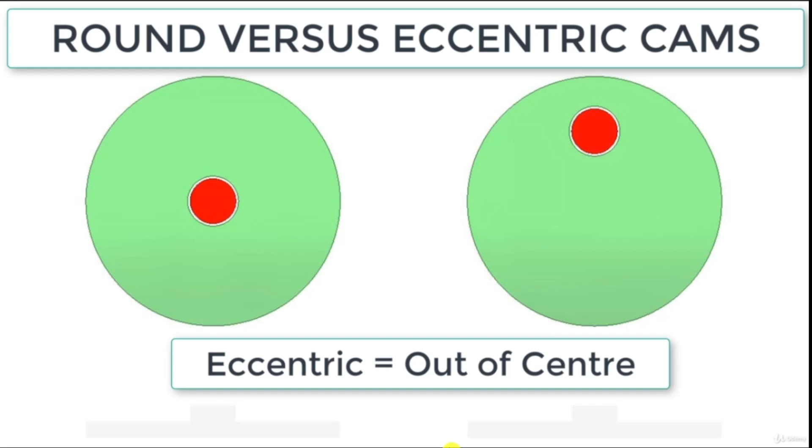I'm going to go to the circle cam, open the file, and add a small cutout on this. Select the rectangle and extrude. Just pull that out 10. Close and return.

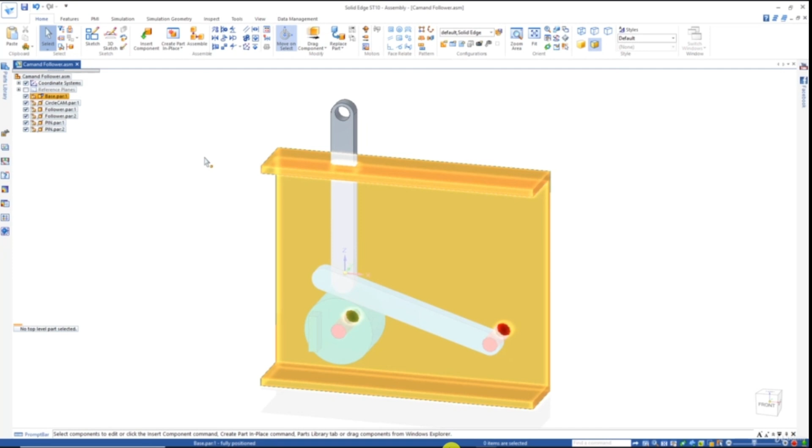Now when I add a motor, you'll be able to see this actually turn. Around the center, flip direction, finish. I'm just going to run this now. Now when we hit play, nothing else happens. You can see the motor's turning, but that's it, because it's circular.

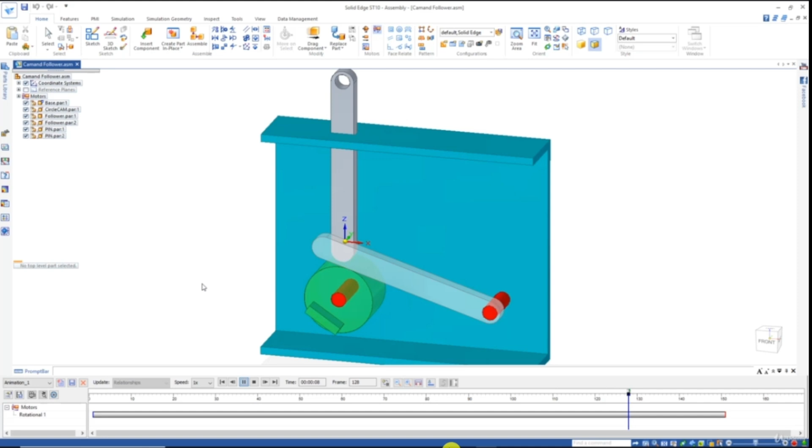Now let's take a look at what happens when we modify the hole on the circle. I'm going to open the circle cam part again, identify the circle, and push the circle out 15. Close and return. And now the whole model updates.

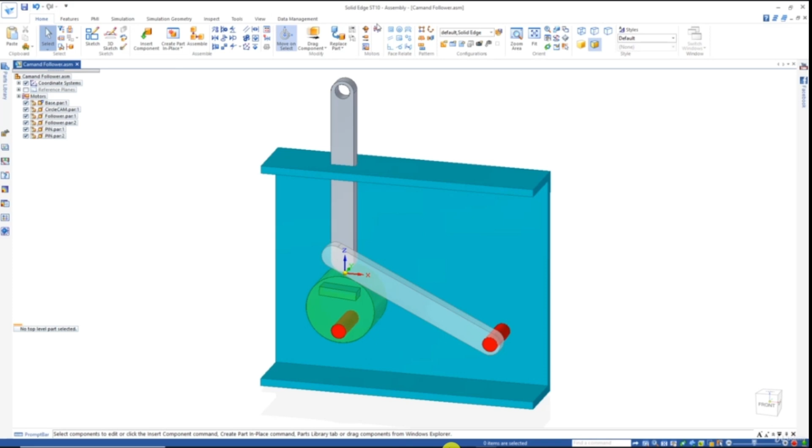I go back here to play again. Now it's off center. When the circle moves out, it acts as a cam with a very even and smooth stroke.

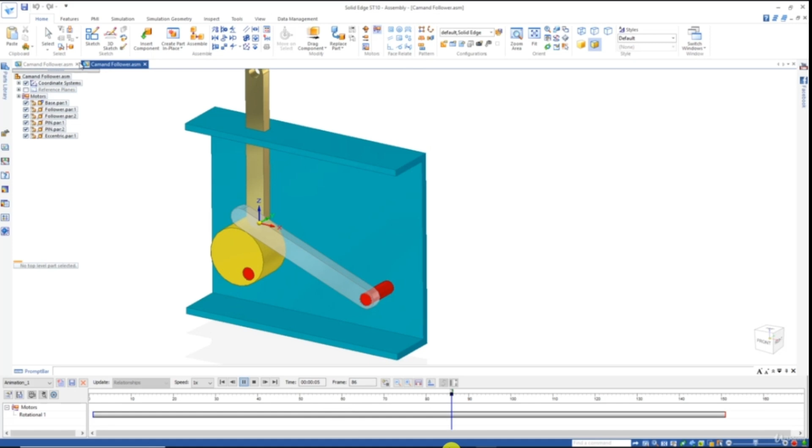To highlight this constant rate of motion, let's add a right angle to this arm. I'll go back and identify the part, the follower, right mouse click to edit, zoom in, go to the line command, and sketch on this face.

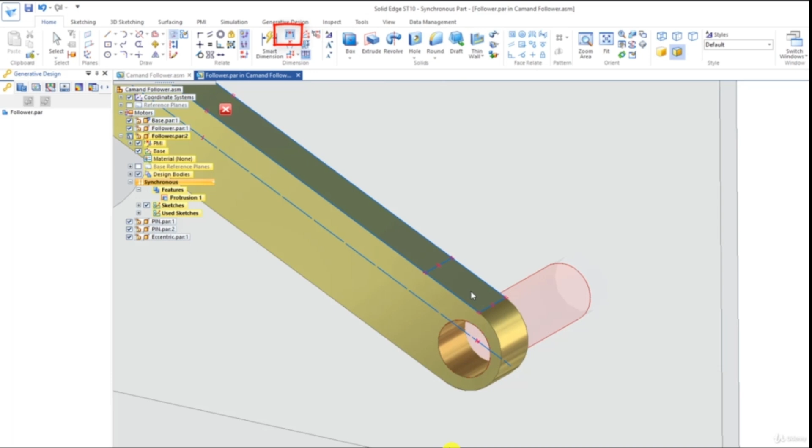I'm just going to draw a line right across here, and then borrow some geometry, borrow this line here and these two on the outside. I'd like to also put a dimension on here to keep this at the same thickness.

And I'll make that 12. Select, identify that region, and I'll pull that out 145, and fit the view. And obviously because I've changed this one, it changes this one because they're the same part.

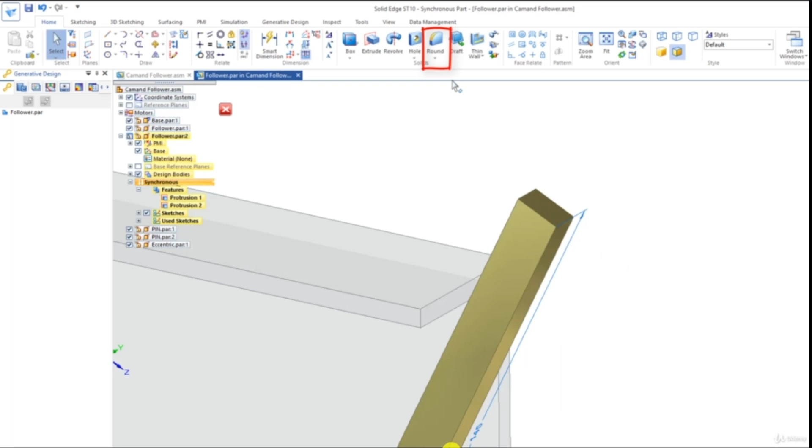Let's make one additional change here. I'll go to round, chamfer equals setbacks, and identify these two edges here. Let's put in a chamfer of 7. And I'll close and return.

Let's run this again. And let's fix this interference issue here.

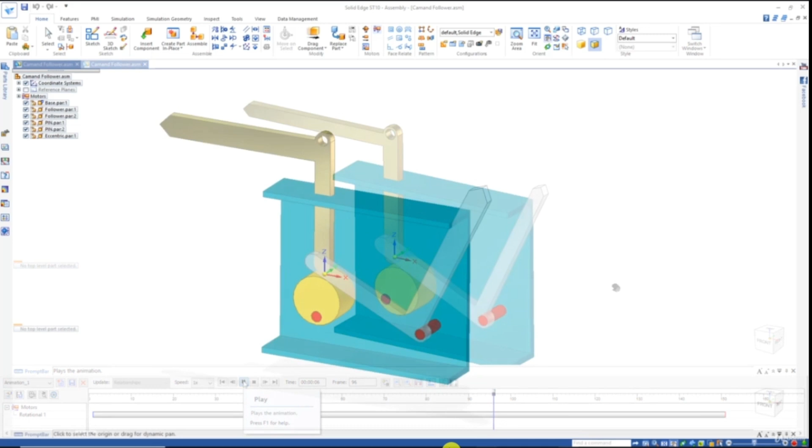I'll double click on the part and grab this face on this edge right here. Let's pull that out, 35.

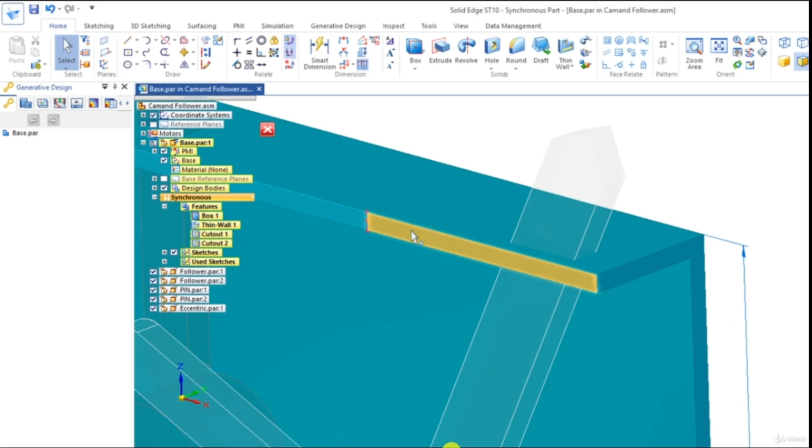I'll just put a little sketch on this face right here, and draw a line anywhere along here. Then I could push in this area right here so that doesn't interfere, just to the other side of that. Close and return, fit the view. Let's run that and also look at it from the other side.